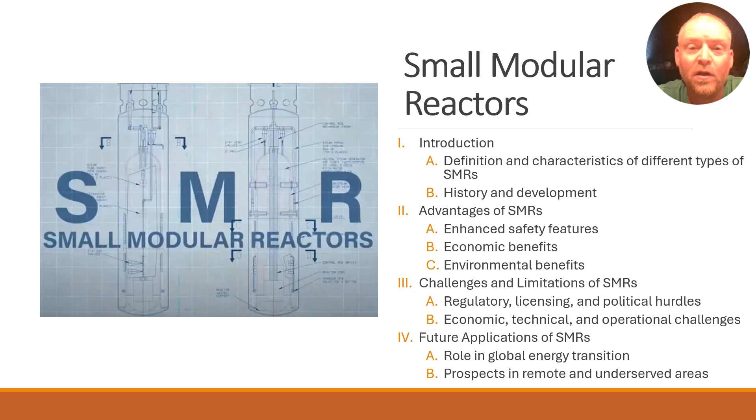Today we will discuss a new nuclear technology known as small modular reactors, also referred to as SMRs. Small modular reactors have a lot of interesting characteristics that make them a very attractive option for many applications. I'll explain to you what small modular reactors are, and I'll tell you about some of the future advantages, challenges, and future applications. So, let's get into this.

First, we need to understand that small modular reactors are in fact nuclear reactors. They're just as their name implies. They're smaller in size and energy output than conventional nuclear reactors. And they're considered modular for two reasons. One, because they can be built off-site and transported to the nuclear plant site where they will be incorporated into the existing infrastructure. And two, they can start out as a singular small output reactor and be added to, almost like Lego blocks, in the future if expansion is needed.

So there are three basic levels of nuclear reactors. According to Coffey, there are microreactors, which operate from 1 megawatt up to 20 megawatts. There are small modular reactors, which operate from 20 megawatts up to 300 megawatts. And then there are your large scale conventional nuclear reactors, which are 300 plus megawatts.

Microreactors are often referred to as VSMRs, or very small modular reactors. Microreactors that are around 1 megawatt are often called nuclear batteries. And these nuclear batteries are often used in remote communities where site conditions and power output needs don't support the need or allow for larger scale reactors to be built.

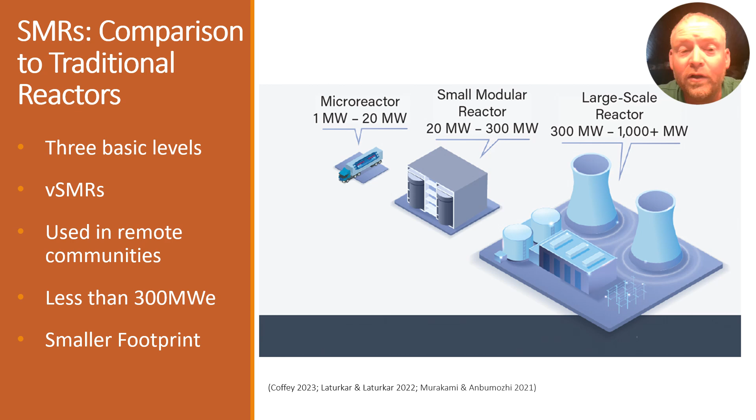Small modular reactors are generally defined as nuclear reactors with less than 300 megawatts of electric capacity. They're also smaller in size than traditional nuclear reactors, so they require a smaller footprint of land to be built on. Let's discuss the flexibility of deployment and scalability.

SMRs typically have a 7 to 20 year core life compared to a 3 to 6 year lifespan of a conventional nuclear reactor. Their small size allows for replacement of the reactor itself versus completely rebuilding the reactor facility in a conventional setup. The flexibility in both output and the ability to replace the reactor make the small modular reactor a very attractive option for nuclear facility construction projects.

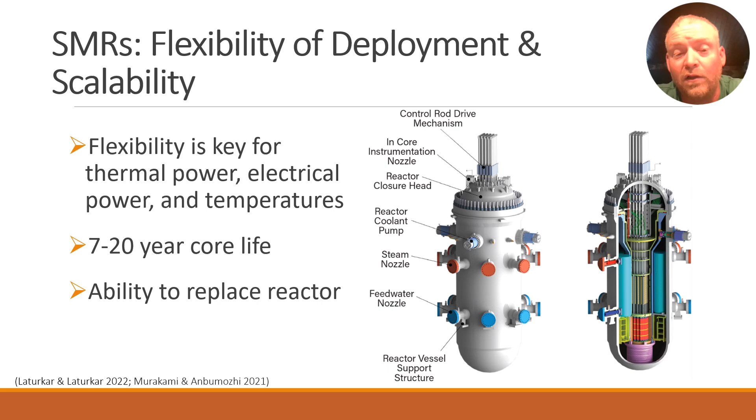Let's do a little brief history of where nuclear reactors started out. In 1951, the first nuclear reactor to produce electricity was built in Idaho. And the first nuclear reactor to be linked to an electrical grid was in Russia in 1954. And this reactor only had a maximum electric capacity of 5 megawatts, which is far below what we're capable of today.

Currently, the most air polluted countries of the world rely heavily on fossil fuels, such as coal and natural gas, to power their electrical grids. And this high usage of fossil fuels leads to high concentrations of greenhouse gas emissions, which lead to climate change issues. The application of more and more SMRs will help push these emissions down to help us eventually reach our goal of zero carbon emissions. Currently, we have a goal set for the year 2050, and hopefully, at the very least, SMRs are able to make some considerable headway towards this goal.

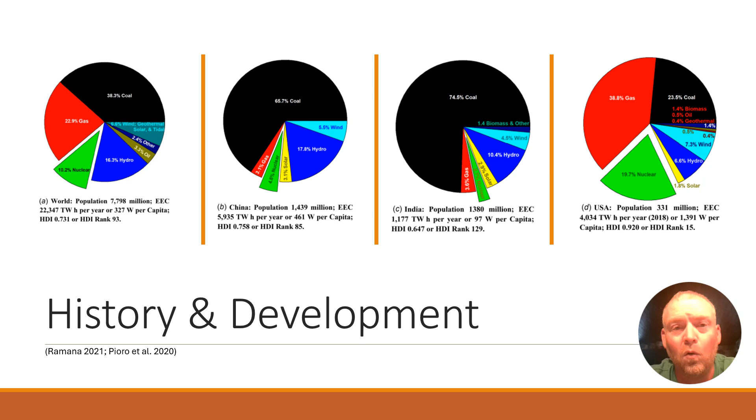Now, let's talk about the advantages of small modular reactors from a safety standpoint. Society, for the most part, still views nuclear reactors as an unsafe energy source. And this perception is one of the biggest hurdles for nuclear energy as a whole. SMRs are inherently safer than conventional nuclear reactors for several reasons.

They acquire passive safety features that are built into the SMRs, which means no active response is needed in order to shut down the reactor if an issue arose. Also, the smaller output from SMRs as well as passive safety systems allow for much smaller emergency planning zones and a much smaller footprint for the overall plant.

SMRs, all else being equal, simply have less radioactive material on hand than conventional nuclear facilities, so a nuclear criticality situation is much less likely to occur. And if it does, it's going to be a much smaller window, much smaller area to have to build these zones. SMRs also produce less radioactive waste, which must be disposed of of course. And less radioactive waste is inherently safer than more radioactive waste.

SMRs also require less refueling than conventional reactors, and refueling can be done while the system is still operating. So that's a major advantage. With fewer refueling requirements, there's less risk for nuclear fuel accidents. Lower power also means lower operating pressure, which is definitely safer in the event of a leak or catastrophic failure.

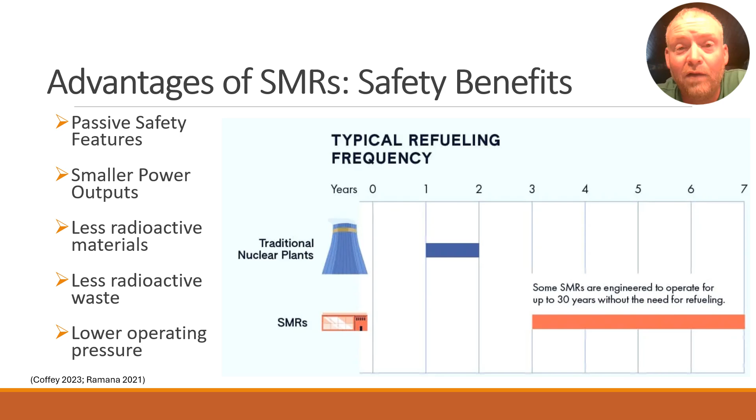Greenhouse gas emissions from coal-fired power plants are an externality affecting the surrounding environments and overall human health. SMRs avoid the burning of fossil fuels, which eliminates greenhouse gas emissions, which is another fine example of an advantage we get from SMRs. Another set of advantages we're going to talk about are from an economics viewpoint.

Small modular reactors offer a lower initial capital investment, greater scalability, and flexibility for locations unable to accommodate more traditional large-scale reactors. A smaller footprint allows for cheaper investment for both the land needed as well as the cost of building a larger plant. So the flexibility of SMRs allows for many options to plant designers, considering that the designs are standardized and simplified. The designers can start out very small with SMRs and add more pieces later to ramp up production as the demand increases.

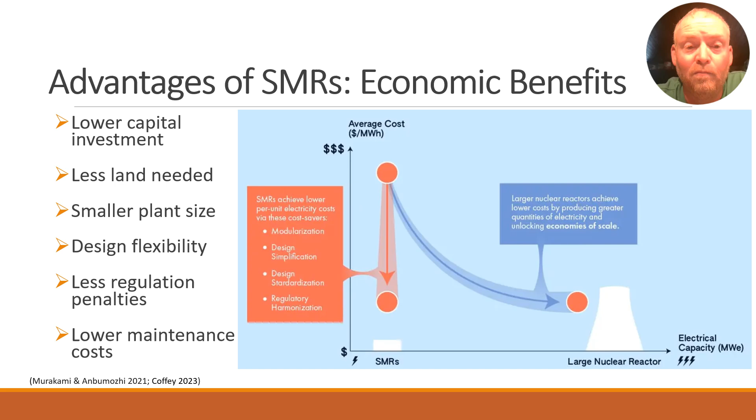They can also be designed to be cooled using several different mediums. These include light water or other non-light water coolants such as gas, liquid metals, or even molten salt. Reduced emissions from SMRs greatly benefit from an economic standpoint. Lower emissions means less regulation penalties are incurred. Lower emissions also prevent health hazards, which must be addressed in the future. High-skilled jobs are created, which adds money to local economies. And lastly, SMRs also have lower maintenance and operational costs when compared to much larger conventional nuclear reactors.

Now let's talk about some environmental benefits. The most obvious environmental benefit that comes to mind is the lower greenhouse gas emissions, of course. Nuclear power plants do not use fossil fuels to heat their water and turn the turbines, so there's no burning of fossil fuels, which in turn creates no greenhouse gas emissions. Greenhouse gases cause all sorts of environmental issues, and if those can be eliminated, then the environment, as well as human health, will be improved significantly.

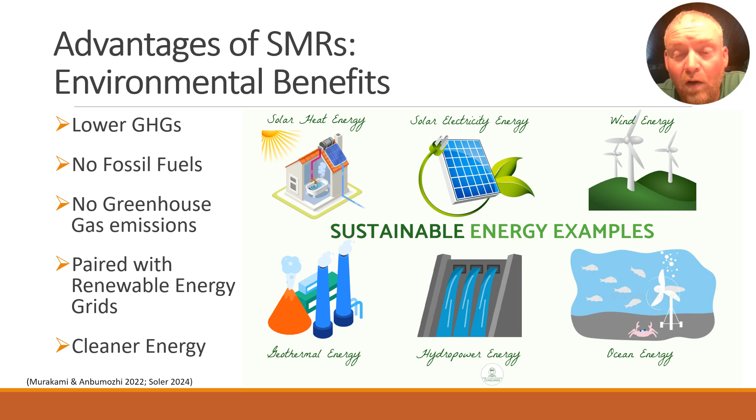Because of their lower energy outputs, SMRs are able to be paired up with energy grids of renewable energy sources such as hydro, solar, and wind energy, which all promote environmental health. And we all know that cleaner energy is just better for the environment in all aspects, and that's the way of the future. So what are some challenges and limitations of small modular reactors? We've discussed all the positives. Let's look at some of the negatives.

Regulations, licensing, and political hurdles are common challenges with any nuclear power plant. This is going to be an even slower process when dealing with a new technology such as small modular reactors. All of the previous government regulations for nuclear reactors have to be followed, and with any new technology, they'll require a new set of regulations, which takes time to implement. The licensing process can already be slow, and with new technology, this process can be hindered even further. The same holds true for regulations.

Anytime local and federal governments have their involvement with regulations for new technology, such as SMRs, there are many time-consuming hurdles that must be overcome before any construction may begin. Political hurdles can be an even bigger issue when talking about nuclear technologies. Needless to say, political parties tend to disagree on most anything, and this is definitely the case with nuclear energy. There can also be variations in regulations from one country to another, so a plan that works in the United States may not be feasible in the Middle East or Europe. There's also several economic, technical, and operational challenges with SMRs. We have to factor in the high cost of research and development.

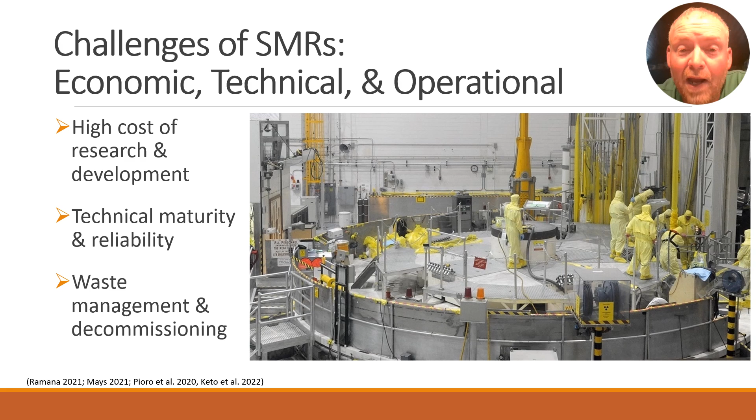Also, their operation can be altered for the efficient burnup of plutonium and minor actinides, which allows molten salt reactors to consume waste from other reactors, which is obviously a very attractive option.

So, do we expect SMRs to play a role in global clean energy transition? Well, I've mentioned a few times that SMRs avoid using fossil fuels as an energy input for their reactors. And carbon penalties are expected to keep rising as global decarbonization goals and regulations tighten. So obviously, I believe SMRs appear to be included in future electricity production.

Some countries that have never utilized nuclear energy are considering SMRs for deployment due to their advantages both economically and environmentally. Now, there are political barriers and pushback from certain groups that do not want nuclear energy as a competitor. But these countries have environmental emission policy demands that must be met, and SMRs help to accomplish such goals.

The global role SMRs will play depends heavily on the cost. Current cost estimates are highly hypothetical, given the lack of SMR history to back these estimates. So these unknowns need to be scrutinized before SMRs can be deployed.

So how do SMRs address energy needs in isolated regions? Well, the small size of micro and small modular reactors make them an attractive option for remote regions. The ability of small modular reactors to tie into existing power grids is a huge advantage. The design and size of modular reactors also makes them easily transported from site to site as needed.